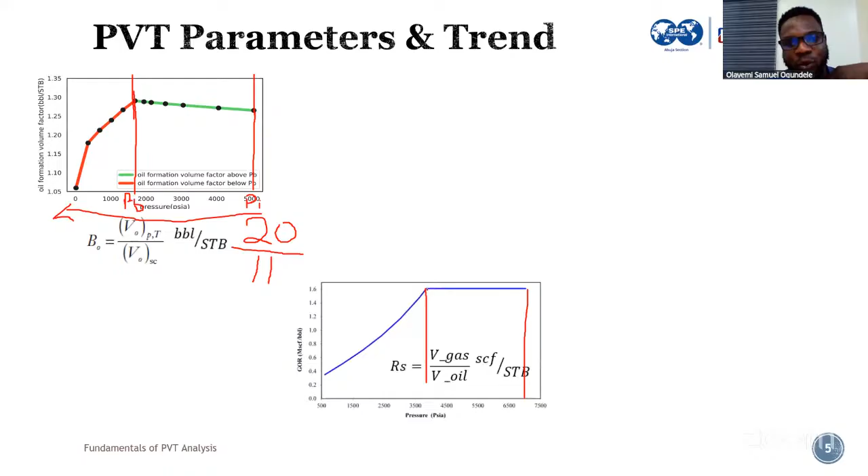Like the soda bottle used as an illustration earlier: at high pressure, gas dissolves, so we have high gas solubility. At low pressure, gas comes out, and that's exactly what happens here, the RS decreases. So when the soda bottle is completely closed, it is expected that the gas is completely dissolved in there.

Moving forward, we'll go to the next trend, which is density. Density is just the ratio of mass over volume, so mass of oil over volume of oil. This graph behaves differently. This is initial pressure, and I love interpreting from the right hand side to the left hand side, because it makes sense that as we are removing fluid from the reservoir, the pressure is depleting.

So now at this point, we believe this is still the same fact that this place is undersaturated, that is one single phase, and gas is completely dissolved in there. And density is the ratio of our mass to the volume. So the relationship is supposed to be: as density increases, the volume is supposed to decrease.

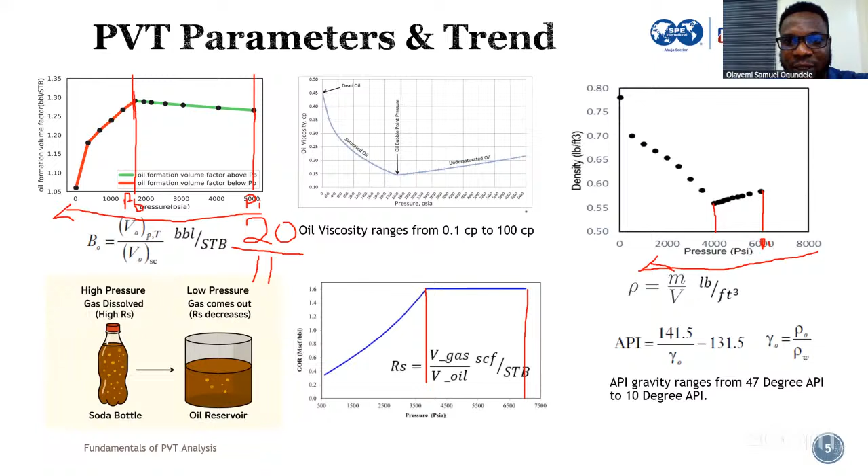So API gravity ranges from very light oil, which is around 47 degrees API, to heavy oil, which is around 10 degrees API. I won't be dwelling much on this property, because that trend is almost similar to what happens in density. And viscosity is the resistance of the fluid to flow. So as we are decreasing the pressure, we have gas in here. The gas makes it less dense, so it can flow. So it makes sense that the trend begins to decrease here.

Then when gas begins to evolve out of that oil, the trend begins to go up, in the sense that the oil is now heavier. So there are two things happening there. As the pressure is decreased, the gas evolves below the bubble point, then it becomes heavier. And also, when you have less pressure to push the oil, the oil is also very dense at this point. So the flow will be restricted.

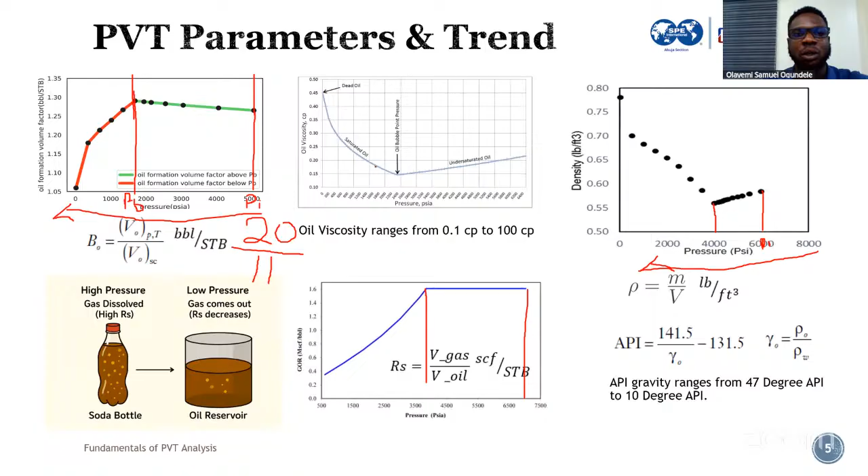So there are other parameters. I just want to take my time to explain these four parameters, because if we are able to get these, we can look at the other parameters at a later time, maybe gas formation volume factor, and also compressibility. So moving forward, I want to talk about the sources of PVT data.

So it was established yesterday that we're collecting samples. What do we do with those samples? We're collecting samples from the bottom hole. We're collecting samples from surface. Why are we collecting the sample? Collecting the sample is not equivalent to getting those parameters without doing anything with it. So that's why we have to take the sample into the laboratory. In the laboratory, we can get the parameters we're looking for, such as Bo, the oil formation volume factor, the gas solubility Rs, the density, most importantly the bubble point pressure, and the likes.

So there are a lot of tests carried out in the laboratory, but we'll be talking about just three here, the basic, routine ones: the constant composition experiment, which in some cases you see as constant mass study; then depletion experiments, which can either be differential liberation experiment or constant volume depletion; then the other one is separator test.

Yes, we have other tests like swelling test. You might have come across that, but that is necessary when we want to do further study, maybe enhanced recovery. These are the basic ones needed at the beginning of our study to understand what our reservoir looks like. So there's another source we can get.

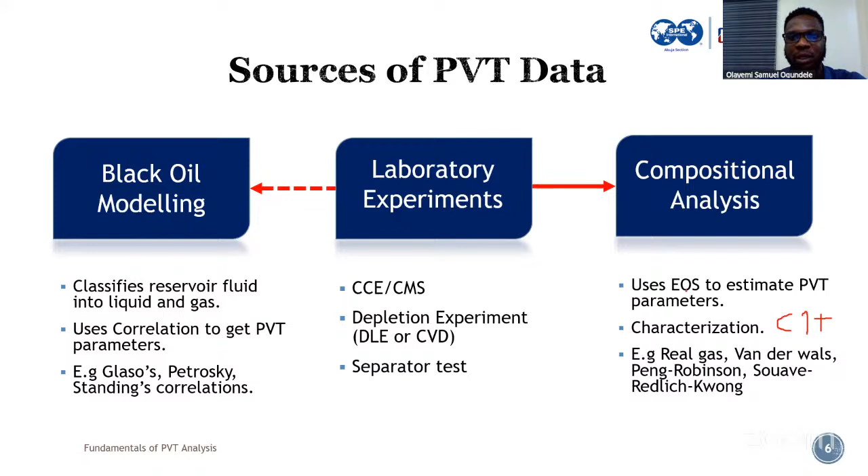So in a nutshell, black oil modeling does not necessarily depend on the results gotten from laboratory experiments, but compositional analysis does. We get information to go ahead with compositional analysis through laboratory experiments that have been conducted earlier. So that's that. Now, we begin to look at the tests that we discussed earlier.

So the first test here is the constant composition experiment. After you have taken your samples, you bring them to the laboratory, then you insert the sample in a PVT cell, which is what you are looking at in this figure. This is the pressure that is provided. I said we need this sample to be a replica of whatever we have in the reservoir. And we want to get it at 100% oil, that is undersaturated single-phase oil. So that is what is being done here.

But before this stage, there's what we call a validity check. A lot of things might have gone on to ensure that what we are getting is actually what's in the reservoir. So after getting it into the PVT cell, there will be a pressure support, which can be either mercury or gas. Now I would like to use a clock as an illustration. Let's say this is my 4 o'clock. At this cell, you ensure that you raise the pressure above your initial reservoir pressure.

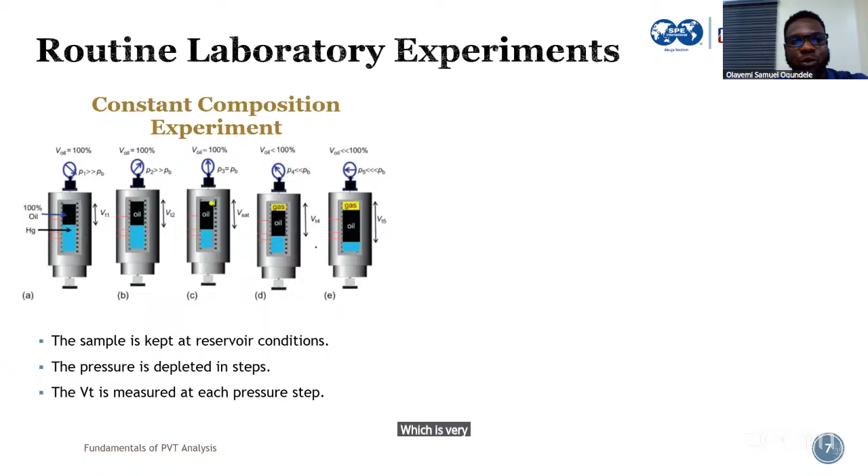So like I said, the sample is kept at reservoir condition, constant temperature, and pressure above the initial reservoir pressure. The pressure is depleted in steps, like has been discussed. The total volume is measured at each pressure step, which represents our relative volume. So that is that about constant composition experiment. The most important thing we want to get out of here is our bubble point, which is very, very important to whichever analysis we're going to do going forward.

So another test is differential liberation experiment. The difference here is that you still use your PVT cell, but now instead of starting at pressure above reservoir pressure, we are starting at bubble point pressure. That's why I said constant composition experiment is very, very important. So this will be where we are going to start our differential liberation experiment. We're still using constant temperature, then at the bubble point. So it's basically what we are doing here on constant composition.

We will keep reducing the pressure, then at bubble point, gas has been coming out of oil, right? So continually, as we decrease the pressure, the gas begins to accumulate. Then we measure this gas. We take out this gas.

And one thing I forgot to mention here is why it's called constant composition experiment. You might be wondering why: because nothing is being removed until the experiment is completed. Whatever is inside in the beginning of the experiment is what remains inside till the end. But here, as the pressure is being decreased, you allow the gas to come into equilibrium with the liquid, you collect it and you measure it as your Rs. That's the gas solubility. Then you keep on doing that, measuring the volume till it gets to atmospheric condition of 14.7 psi and 60 degree Fahrenheit.

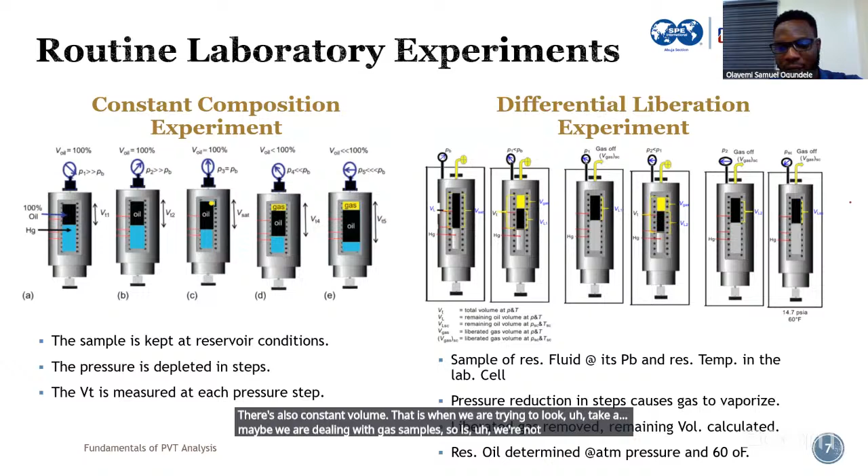So what happens is you take that sample at bubble point pressure. You begin to appreciate why bubble point pressure is important, because it actually goes with the flow of what we are going to do. So you're at bubble point pressure and you expel those fluids into your first separator. And instead of reservoir temperature, you are using the separator temperature here and the separator pressure conditions.

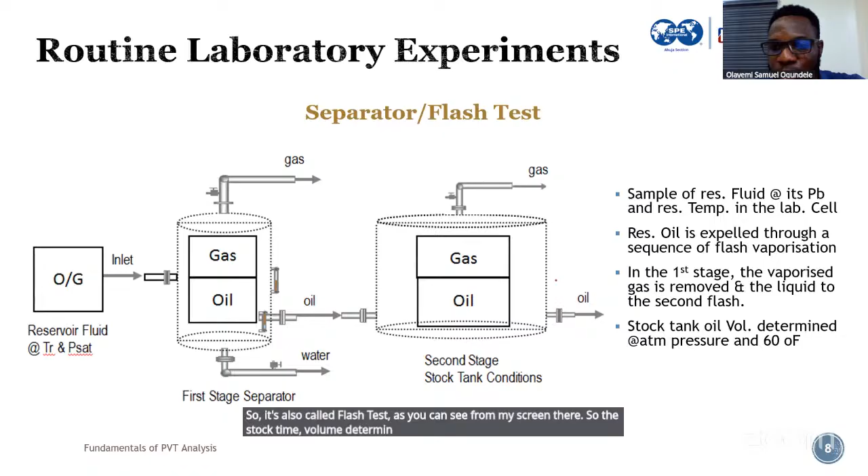So like I said, a sample of reservoir fluid at bubble point in the lab cell, the reservoir oil is expelled through a sequence of flash vaporization. In this case, in the first stage, the vaporized gas is removed and the liquid goes to the second stage flash. So it's also called flash test, as you can see from my screen there. The stock tank oil volume is determined at atmospheric pressure and 60 degrees Fahrenheit, so at surface condition.

So now, all those experiments being discussed, these are the key parameters you get from there. For constant composition experiments, you get your bubble point pressure, you also get your oil compressibility, and you also get the value of your oil density. Then for differential liberation experiments, you get formation volume factor of oil, you get gas solubility, you get oil viscosity. Then for separator test, you get your values of Bo, Rs, and oil density.

Now, you can remember that my colleague established that one of the importance of getting these parameters is to be able to use them in a material balance equation, which is one of the ways we can estimate the reserves we have. I know almost everybody here may be familiar with this equation. This is a typical material balance equation. So how do we get information for MBE? Why am I asking this? If you look at this formula very well, you know that you need information such as Bo, you need information such as Rs.

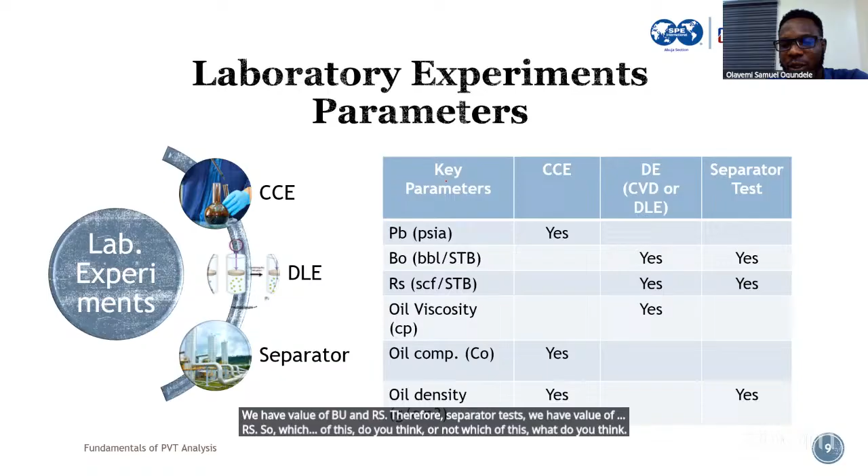So now, going back to this, for differential experiments, we have values of Bo and Rs. Then for separator test, we have values of Bo and Rs. So what do you think is basically being used for the material balance equation? How do we go about that? If you have any idea, just drop it in the chat box in just a minute. Let me see if you're actually following. Please drop it, a quick one, just a minute. No one is dropping anything. Are we following? Which of those values of Bo and Rs would you want to use as a petroleum engineer? Let me put it that way.

Okay, I'm not seeing anything in the chat, so let me just move ahead. So what we basically do here is we can't just directly pick from DLE. We can't just directly pick the separator values. So what we basically need to do here is an adjustment. And what are we adjusting? We are trying to adjust those parameters from DLE and the separator. So we're finding a way of combining the two, because DLE is just like the lab simulation of what is happening in the reservoir.

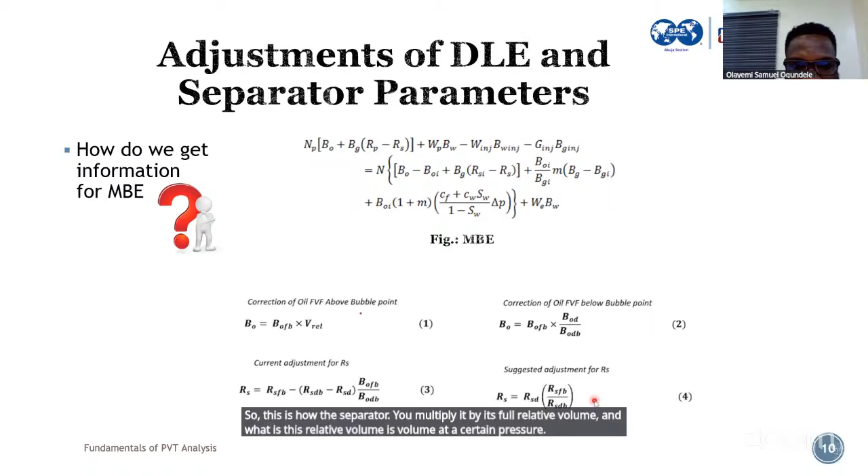And what is this relative volume? It is volume at a certain pressure to volume at the bubble point. So bubble point is just like a reference point here. So above bubble point, you use that to get your value of Bo that you're going to insert here.

Then below bubble point, you use the same bubble point oil formation volume factor at the separator, where the F denotes flash, also known as a separator test. Then multiply by differential liberation oil formation volume factor, then divide by bubble point differential liberation oil formation volume factor. So if time permits, I will quickly show where we can actually get this sample of PVT report.

So current adjustment for Rs, this was developed by Tariq, and this actually has a limitation, and the limitation is it works best at a very high pressure. So when you reduce the pressure, at some point you begin to see negative values of Rs, which is very, very wrong. When you are seeing a negative value, you should know that something is wrong with whatever you are trying to calculate.

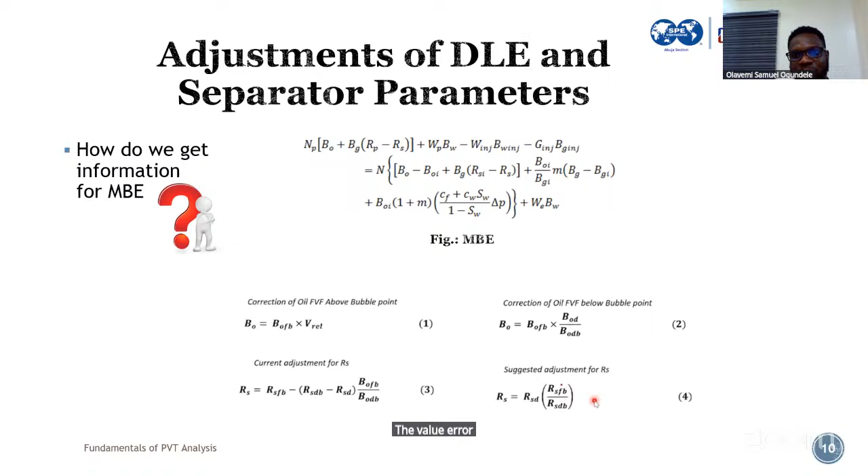So in order to combat that, another set of people led by McCain also proposed another solution where we can get the value of Rs by combining DLE and separator results to basically address the error gotten as a result of low pressure. So this is more accurate.

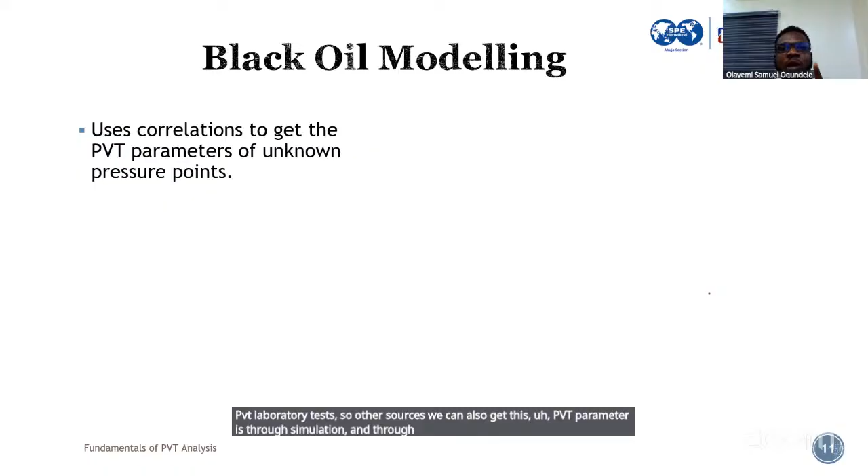So I will quickly rush on black oil modeling. I've talked about a bit of it. Like I said, those are just routine PVT laboratory tests. Other sources where we can get these PVT parameters is through simulation. And in simulation, black oil modeling is one of them, where we talk about different kinds of correlations. It uses correlations to get the PVT parameters at unknown pressure points, as I said earlier.

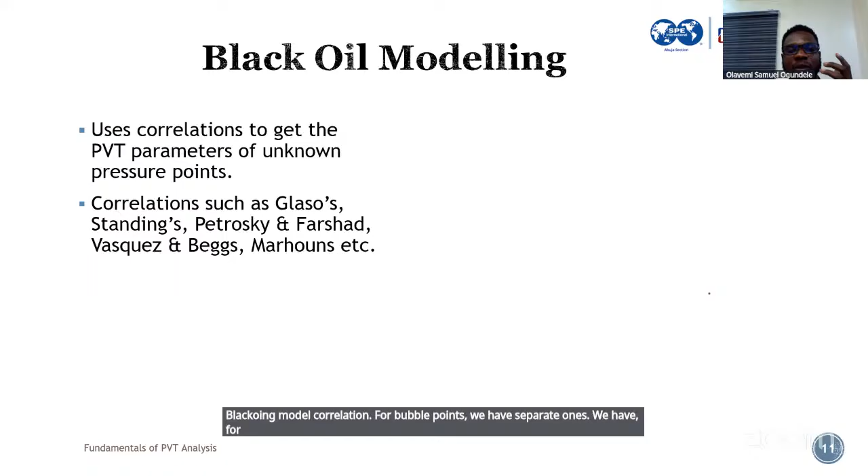So maybe we have 4,000, and the next one from our lab test is around 4,200. If we want to get information between that, we can use a black oil model that has already been established. Like I said, we have Glaso, Standing, Petrosky, Farshad, Vasquez-Beggs, Marhoun also. For viscosity, we have different black oil model correlations. For bubble points, we have separate ones. We have for Bo, we have for Rs. So you can read more on that.

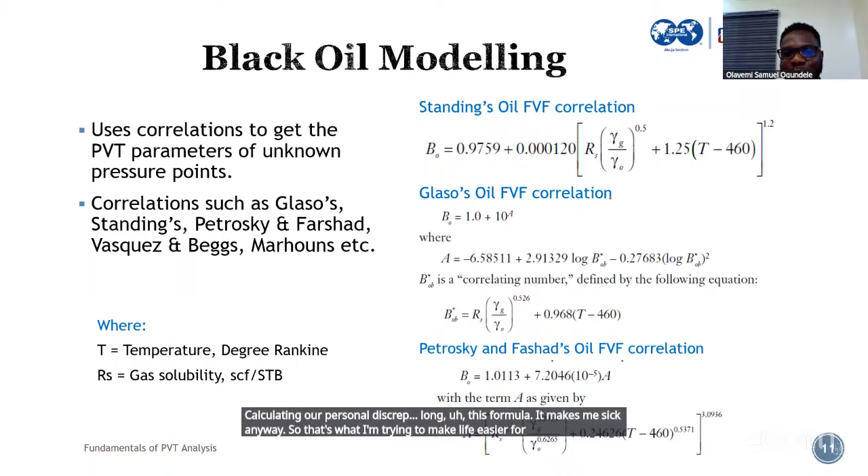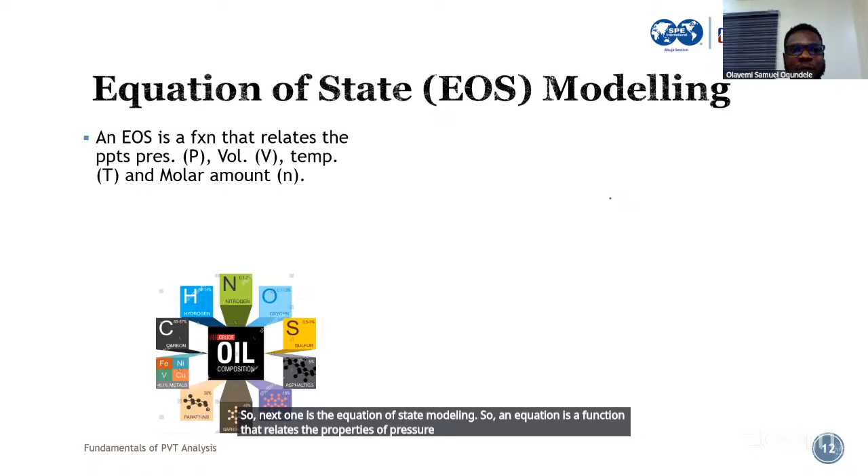So the next one is equation of state modeling. An equation of state is a function that relates the properties of pressure, volume, temperature, and molar amount.

The example of this equation of state, as I've stated earlier: the real gas equation, the van der Waals, and the cubic equations of state, as they're popularly called, which are very common and widely used, mostly in the petroleum industry. They are Peng-Robinson and Soave-Redlich-Kwong equations. Doing this equation of state modeling is just trying to get more information for the pressure points that are not in existence from our laboratory experiment.

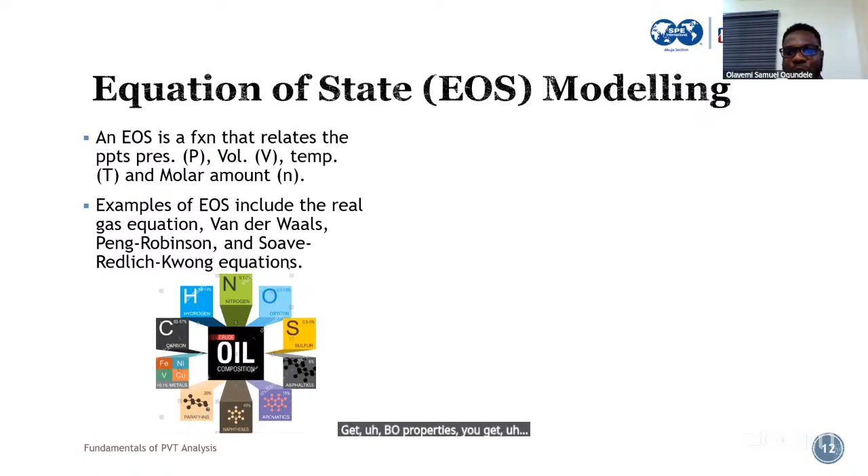This equation of state actually needs information from the laboratory experiment. That's one of those mole fractions, because composition analysis is conducted where you get your mole fraction, then the specific gravity. You need that for your characterization. Then for characterization, you'll be able to get the critical properties such as critical pressure, volume, and temperature. Further, you get properties such as Bo, Rs, and the like.

So these are the steps in carrying out this equation of state modeling. Most importantly, you do fluid sampling, bottom hole or surface, whichever case. Then you take it to the laboratory for PVT analysis. Then the next thing you do is characterization. We discussed earlier that you want to unpack what is inside that lumped sum of undefined hydrocarbon, that is C7 plus, C20 plus, C36 plus, as the case may be. Then equation of state model.

This is where you choose the model you want to use. So basically, maybe you want to choose Peng-Robinson, or you want to choose the Redlich-Kwong equation. Then at the end of the day, there's established information already through your laboratory experiment. Remember that you have your Bo, you have your Rs there. So you want to do tuning, you want to do matching, that is, make sure this is very close to what is obtainable from your laboratory experiment. Then after that, you get your PVT prediction, such as Bo, Rs, density, specific gravity, and the like.

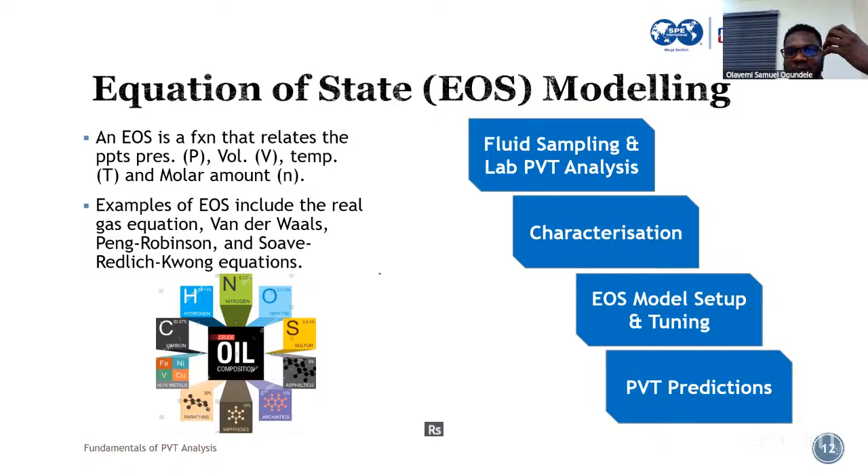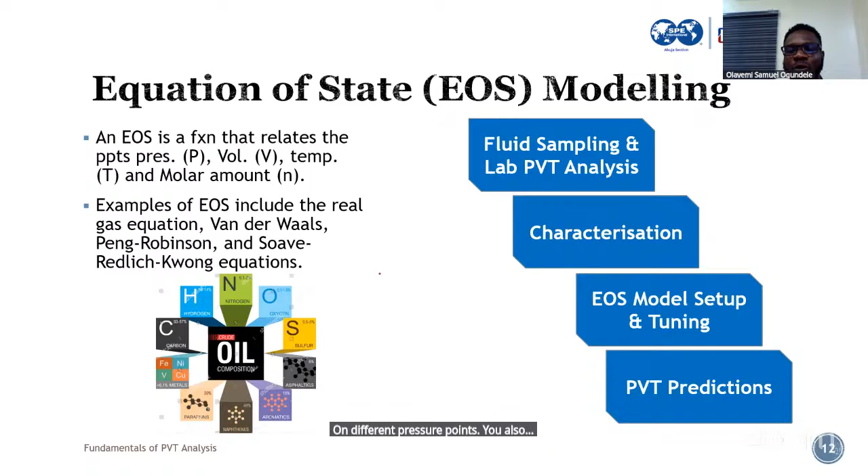So apart from getting more information on different pressure points, you also get to use this for quality checking. You remember someone asked a question yesterday about recombination. So for you to know that your recombination actually works well, you use this equation of state modeling to also quality check whichever thing you are combining. So this also works beyond just determining more properties; it's also used as a tool for quality checking.

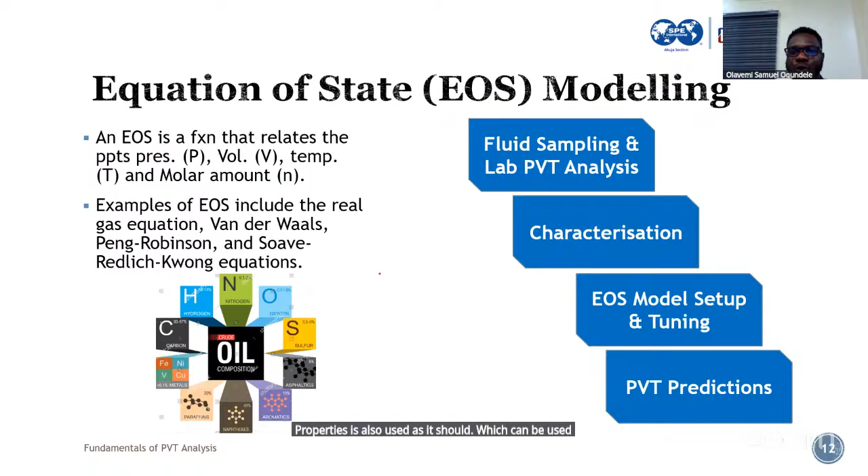So now briefly, we want to see what a PVT report actually looks like. It's going to contain accompanying information when you come across one. This is not general, so it depends on the company handling your report. But you're most likely going to see these sections on your PVT report: the company information, the general well information, maybe it's Shell that is doing it, or any other company. Maybe your general well information comes from a particular well involved in a field in Norway or anywhere. So all that information will be there.

Then a summary of PVT data, everything that has been done is going to be summarized on a page. Then a sample validity check, since you need to make sure your sample is a representative value, so they conduct a test to ensure that whatever sample you're taking to the laboratory is as close as possible to what you have in the reservoir. Then the fluid composition, that is the composition of the fluid, C1, C2, other impurities that may be there, along with the constant composition experiment section. Then DLE, differential liberation experiment, or constant volume depletion, depending on the kind of experiment and fluid you're working on. Also the separator test, and various other appendices with different information.

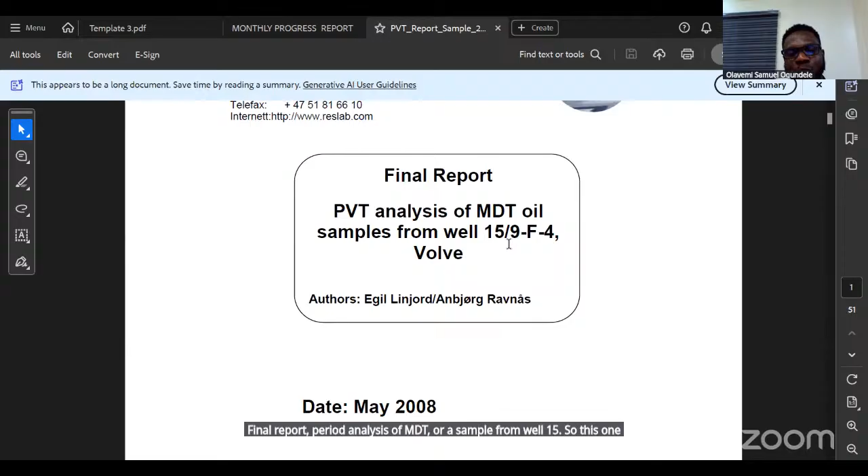So this is a PVT report done by Reservoir Laboratory, as discussed, the elements. This is information about the company, final report, PVT analysis of MDT, oil samples from well 15/9-F-4. So this one is carrying well information, 15/9-F-4 of Volve field somewhere in Norway.

You can get this copy to look at later because I got it online. It was made available, though a PVT is always a confidential document, so you may not see a lot of it out there.

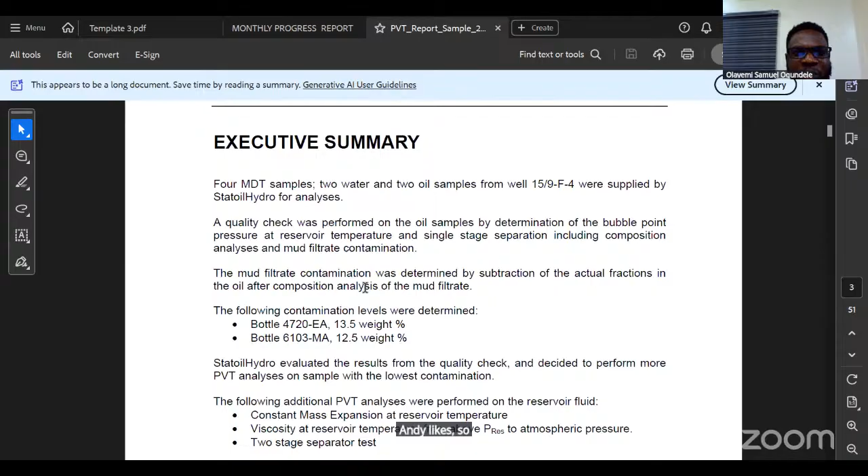So this shows client, country, field, well, and the likes. Then the executive summary, four MDT, two water and two oil samples from the well, you begin to appreciate them. Then it has a table of contents where you have introduction, fluid sample experiments program, the results, quality check, then the composition, then single stage separation of reservoir fluid, constant mass expansion.

I said it can either be a constant composition experiment or constant mass study, or even in this case, constant mass expansion. So the naming varies.

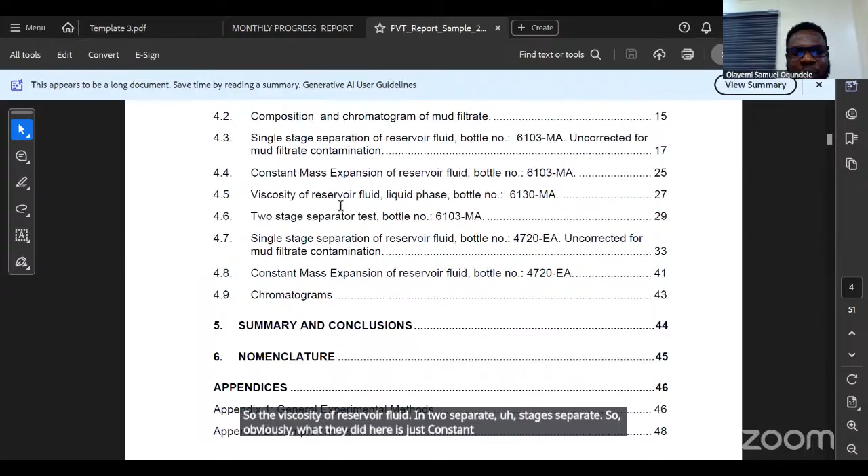So there's the viscosity of reservoir fluid, then two separate stage separators. So obviously what they did here is just constant mass expansion. They didn't do DLE and just moved straight to two-stage separator. So that's how it is if you look at that information. That's how PVT reports typically look like.

So I want to see, running out of battery? No. So that is it.

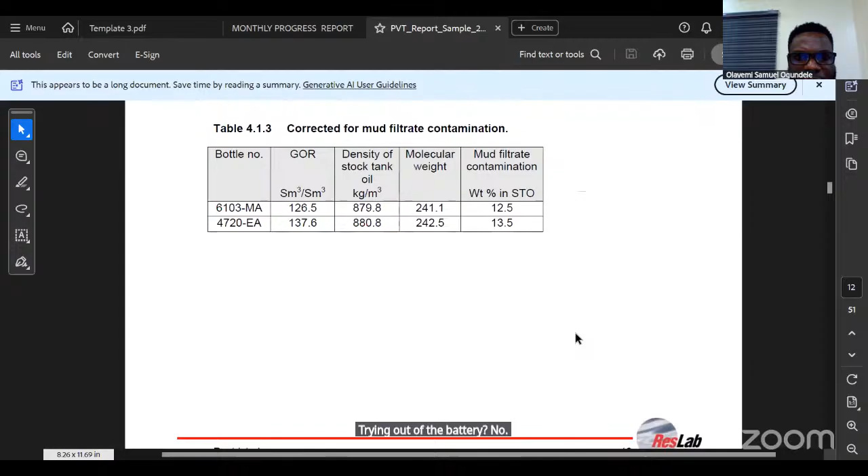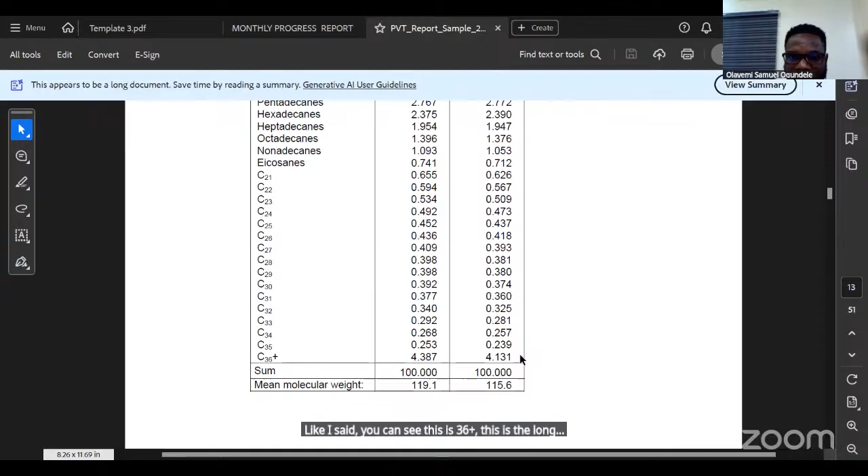So this is the composition of the reservoir fluid. This is the mole percent of it, of nitrogen, and like I said, you can see this is 36 plus, which is the lump sum of it. So that is it on the PVT.

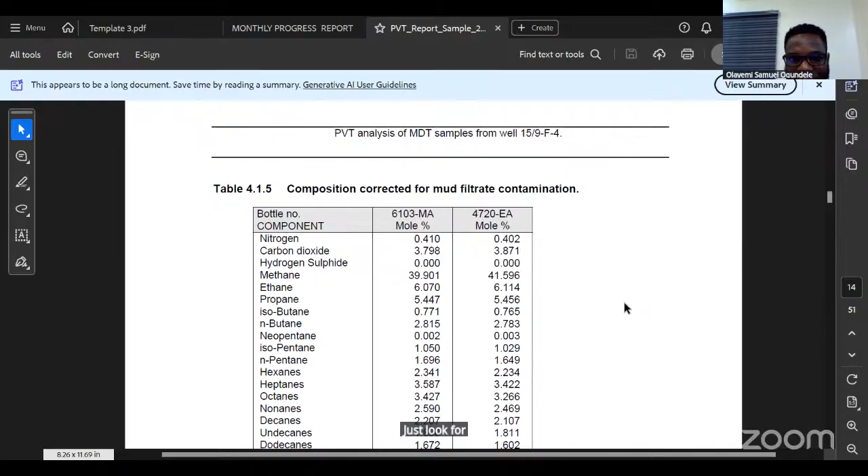So you can just check online and look for PVT reports, and you'll be able to appreciate what we've been discussing earlier better. So I'll continue to the last phase of the presentation.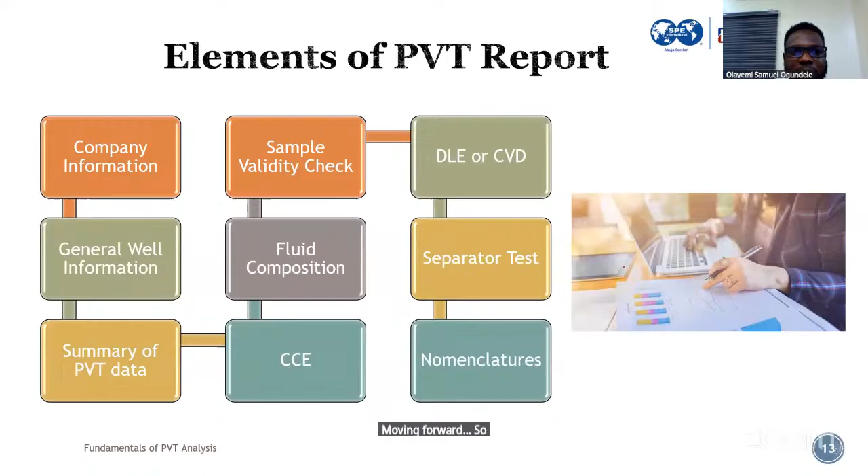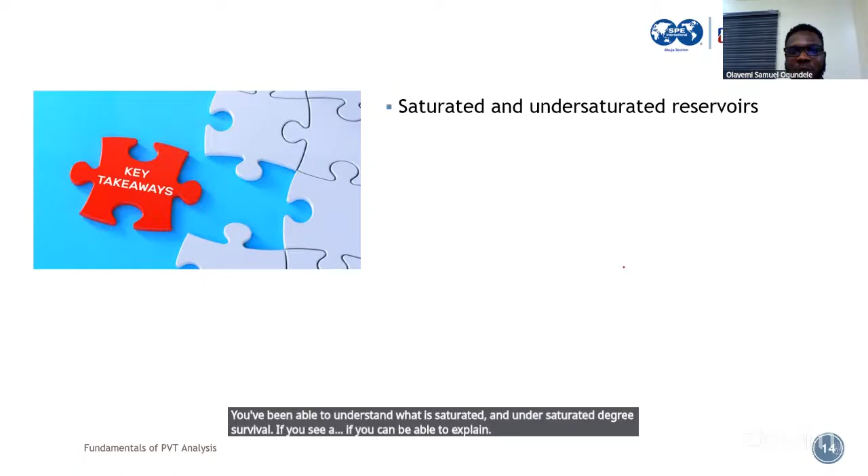So yes, moving forward. I believe that at the end of this presentation, at this point, you've been able to understand what is saturated and undersaturated reservoir. You can be able to explain it to anyone, to your colleague, to someone below your level.

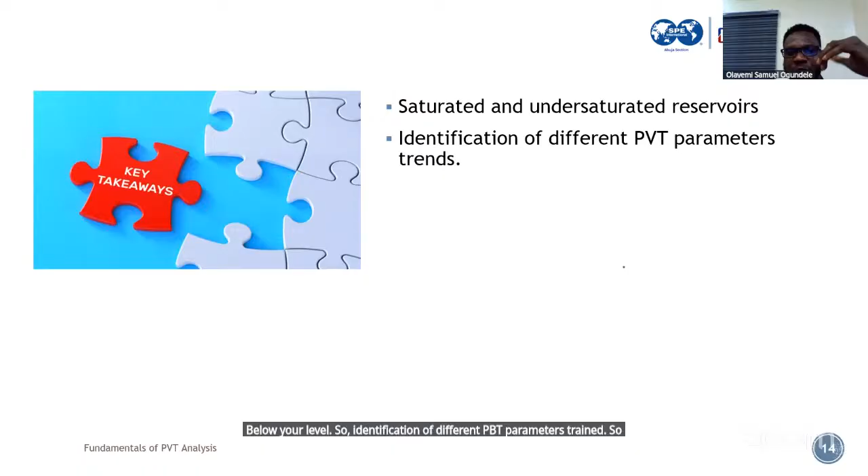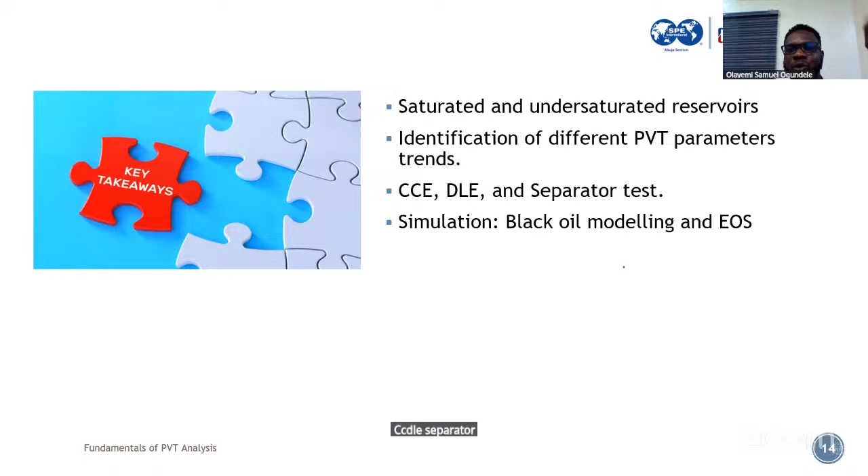So identification of different PVT parameter trends: all those trends we discussed, if you see it, you can actually draw it, you can identify it. If you see it, then you have knowledge of CCE, DLE, separator test, simulation, black oil modeling, and equation of state. Then you have a grasp of a PVT reporting template, you've seen a PVT, you see what it actually contains.

Then I will leave you with this: maximizing API gravity and achieving a low oil formation volume factor and reduced gas solubility will enhance recovery efficiency, boost profitability, and improve crude oil flow through the reservoir and pipeline. So you want to have as low as possible value of Bo.

You would want to be able to recover close to what you have in the reservoir. That's what it's talking about. Then the gas solubility, you wouldn't want more gas present in your oil so that you can have a large volume of oil produced.

Then also you want to get your API as high as possible. Remember, a higher API means your oil is light, so it will reduce your cost of operation and whatever it will be. A lot of things need to be put in place when you are producing maybe asphaltic oil, a very heavy oil in the range of 20-degree API, 10-degree API, and the likes.

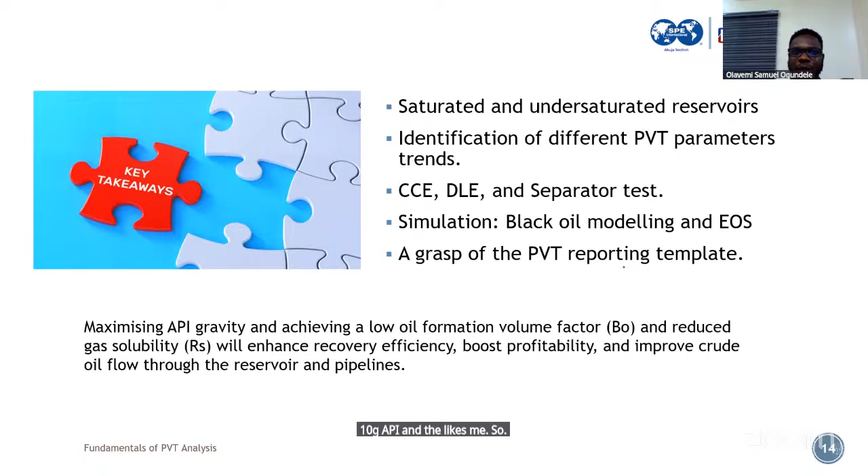So, with this, I've come to the end of my presentation. I'll be glad to take your questions at this point. Thank you so much.

In the CCE, what helps detect gas release? Could you respond to that? Come again, please, in the chat box, somebody has sent a question: in the CCE, what helps detect gas release? Okay, so if I get you correctly, perhaps you're trying to ask, for the CCE, are you trying to determine bubble point pressure? At what point do you get to see or detect your bubble point pressure? Is that what you're asking?